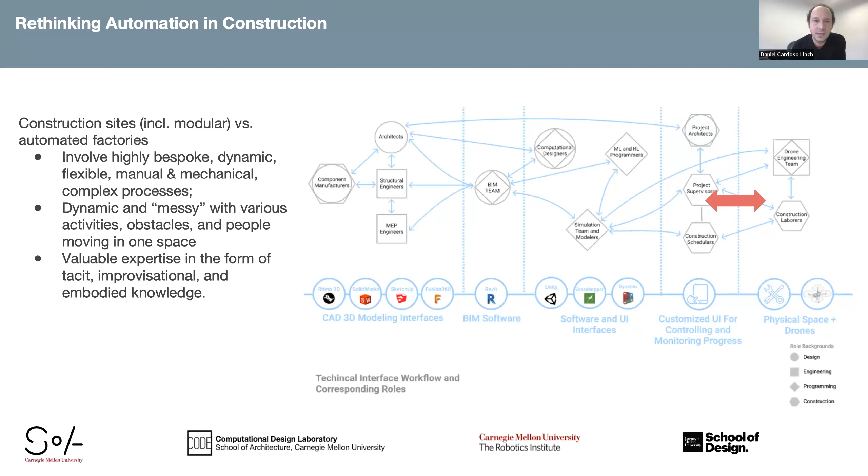So basically, this arrow on the right represents the interface between material production and the definition of digital models for construction. We think this is crucial, essential to rethinking how we design and build in this century.

At a technical level, we're using a particular genre of machine learning, reinforcement learning, which has as a basic premise the idea of trial and error - basically an algorithm that can respond to changing environmental conditions or changing inputs of data.

This is an important difference from conventional industrial robotics, in the sense that rather than relying on pre-programmed instructions or indirect human control, reinforcement learning has the potential to equip robots with real-time, stepwise decision-making capacity that can be exploited in the context of an unstructured environment, such as a construction site or a modular factory.

I think this is very important for architecture and building, because construction sites are notably dynamic environments. They are not laboratories that can be fully controlled, or factories that can be fully scripted. So we think there is promise in reinforcement learning approaches to develop applications and systems that can more dynamically respond to changing conditions and more efficiently and safely support human activities on site.

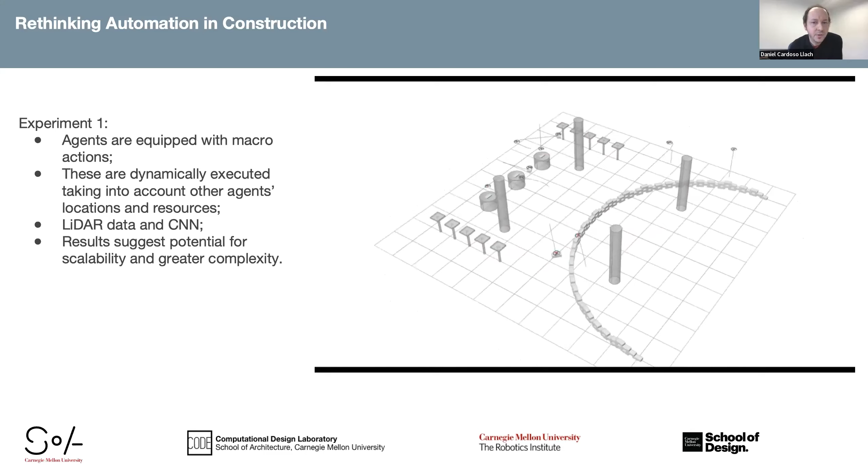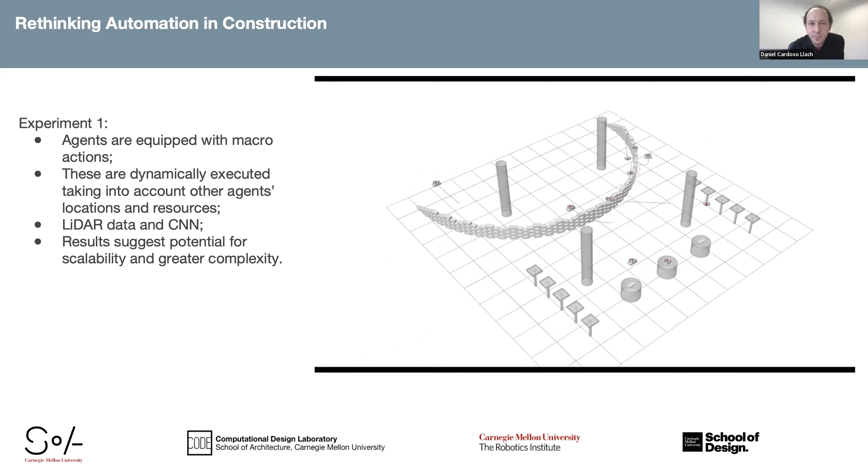In our simulations, we equipped these agents with LiDAR sensor input, and we used common neural network architectures such as MLPs and CNNs to handle different kinds of inputs, and used an evolutionary strategy to gradually increase the difficulty of the learning tasks. Based on this basic setup, we were able to show that this reinforcement learning approach had the potential to be scalable, to have multiple robots collaborating dynamically in a construction task. That gave us the sense that maybe this is interesting, maybe we should look into this more carefully.

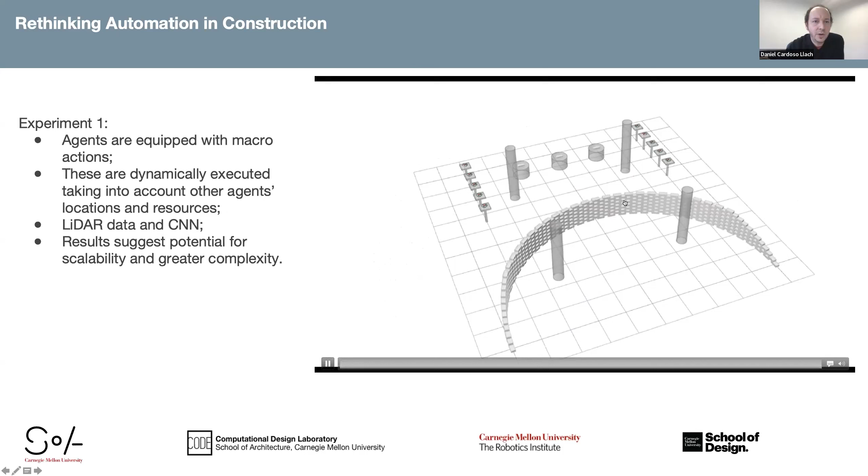We published some results of this experimental work in Acadia last year. But of course, this is a very simple and simplified context, right? We're working with drones where there are a few variables such as material and recharging and some basic environmental change conditions.

So we're interested in how to address the broader complexity of construction. This is the beginning of the project we're in, the MFI supported project, which is exciting to us because we are working closely with industry actors. We're working with PJ Dick, which is a very large construction firm here in Pennsylvania, and with Module, which is a modular factory company.

We are embedded in their workflows, trying to understand and converse with them and develop scenarios for application with them. At the same time, in parallel, we're developing the technical groundwork for the reinforcement learning framework we just discussed. This is an outline of the project.

This is how we're working towards task specification. Basically, we're working with them to define scenarios of application of this technology in conjunction with observations on site and ethnographic qualitative engagement with construction workers directly, and the collaborative definition of benchmarks and areas of concern or interest, both from their side and from our side as researchers.

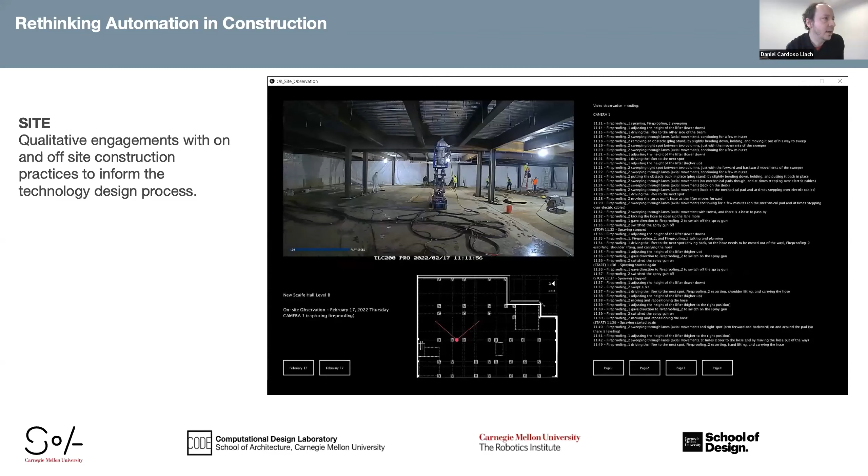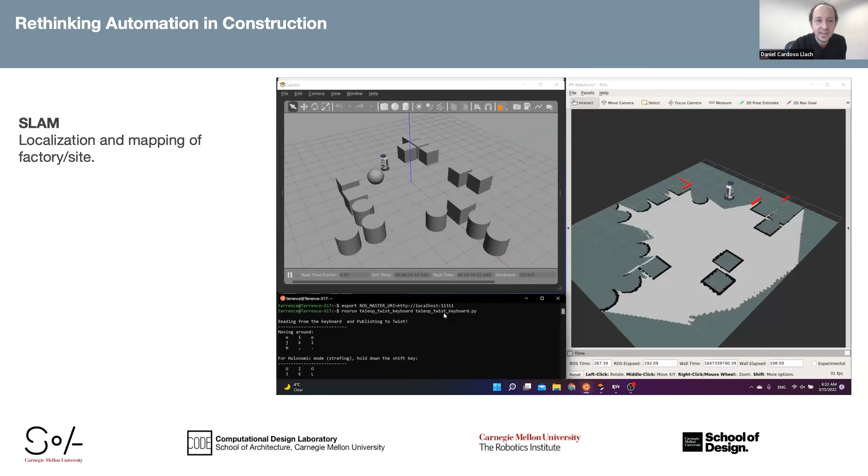Let's move on. Similarly, the pedestrian detection and mapping, and crucially, the social navigation component of the robot. Construction sites and modular factories are places populated by human workers. We want the robot to be able to navigate those spaces in a way that is safe and effective. So we're using social navigation algorithms developed here at Carnegie Mellon in the CMU big group as a way of testing this technology.

So I don't want to extend myself. I'm already above 10 minutes, so maybe I'll stop here. I think this was an outline of the project. I'll be happy to talk more and especially to learn from my colleagues about their work. So thank you so much.

Wonderful. Thanks so much, Daniel. That was fascinating to see these details about your work. Next, I'd ask Keith to share with us his presentation. Sure. Thanks, Keith. Yep.

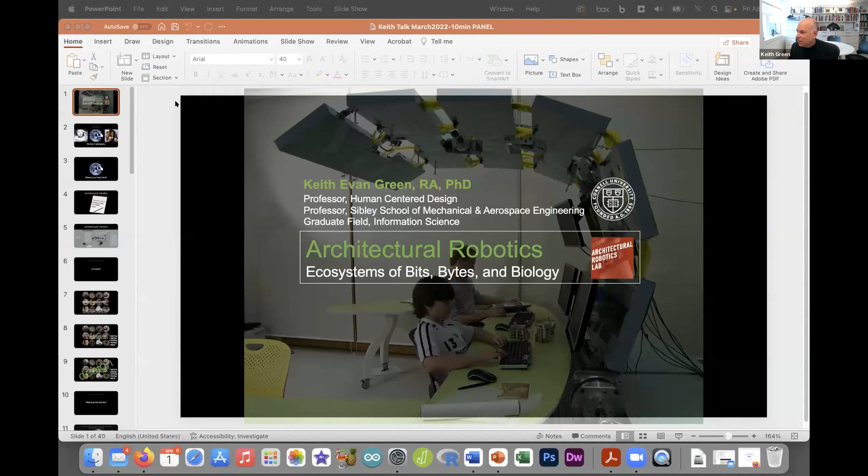Let's see, hopefully something happening there. Are you seeing, it's only on one side. Oh, here we go. We should be on our way. So that people can see things, right? Hopefully, good. Okay, hi.

So I'm Keith Green from Cornell, and I'll get right into it about architectural robotics. Big picture: we live in cyberspace. This is what we often encounter when we're interacting with people—they're interacting with machines, these little machines that we carry around. So the question is, if that's the world we're living in increasingly, an increasingly digital world, where is our home in it?

My response is to develop, as Bill Mitchell said, a robot for living in—a robot that we live in that dignifies, enables, and empowers us. And as Kristian mentioned, I wrote a book about this. I didn't even know if there was a book to write, but MIT Press convinced me that there was. So some years ago, I wrote this book.

And the question is, for whom? Whom is architectural robotics for? We'll define architectural robotics in a minute, but we understand by those two terms together that it's something about architecture and robotics. So we're really thinking about a diverse human population. And what are they doing? Well, they're engaged in wicked problems, under-determined problems of living, learning, playing, working, moving, aging, and other things.

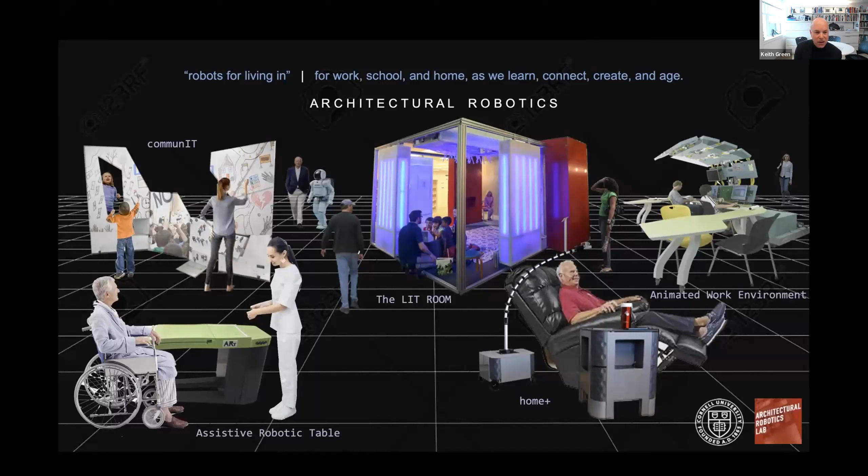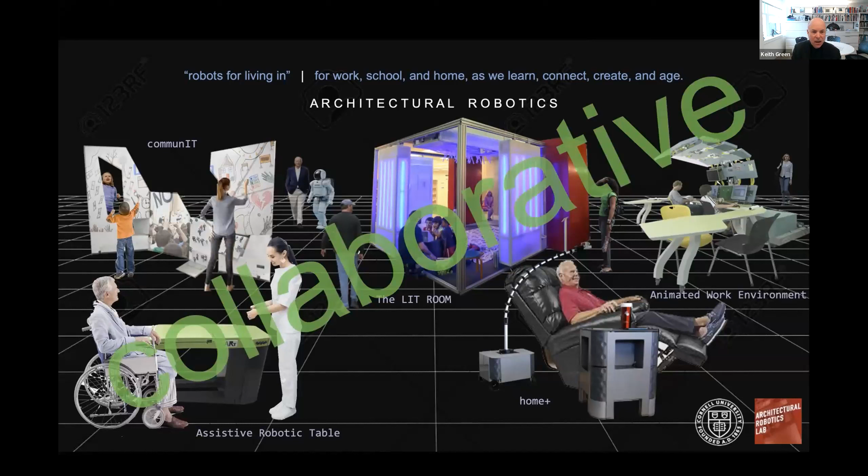I think most of these were in the book, so they're a little bit past tense. We're doing a lot of new things, but it gives you sort of a breadth of the landscape that we're working in. And this is very collaborative—I think it is apt for the topic of today, which is a collaborative environment that has embedded robotics.

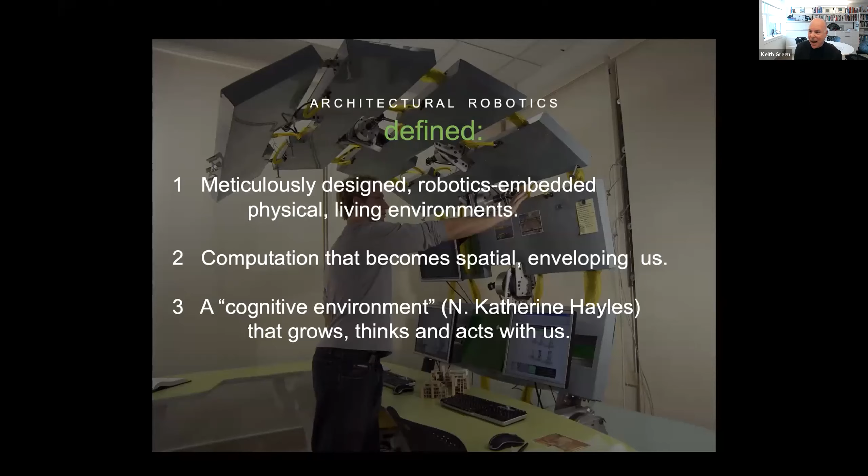How do we define this, finally? A few ways: architectural robotics may be defined as meticulously designed, robotics-embedded physical living environments, computation that becomes spatial, enveloping us. And then, from someone I shared the stage with in Delft for a conference as a keynote, Katherine Hayles, she speaks of cognitive environments. She said, what you do, Keith, is you develop cognitive environments that at least aim to grow, think, and act with people. So why do we want this?

You know, it's easy to say that we have robots and we have architecture, we put them together and that people are going to love them. But it's nice to know that there might be some motivation for developing such things. So I'm going to speak very briefly about five human dispositions for architectural robotics.

The first being psychological: human beings are protean, fluid and adaptive, many-sided, and we seek many and new places to exist. From an evolutionary disposition, we exhibit adaptive flexibility—we've emerged as a species with the capacity to buffer itself and adjust to environmental dynamics. From a learning disposition, the brain wants variation, it wants movement, it wants change. That's how we learn.

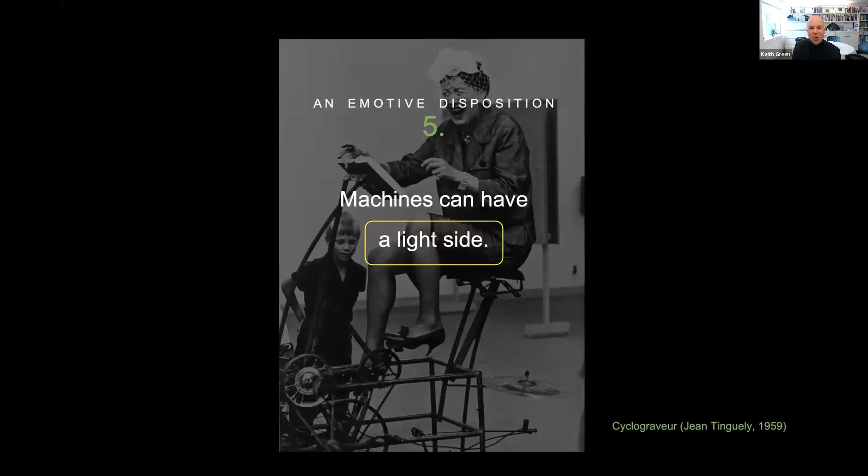And then from a poetic disposition, thinking about Marinetti at the beginning of the Futurists: we have, as Marinetti put it, a burning passion for the coming into being of things, a framework we can consolidate always differently. And finally, an emotive disposition—machines don't always have to be high performance, high performing, functional. They may actually afford people a little bit of pleasure or fun, and that might be an aim.

So let's consider some fundamental questions. I'm at a fairly high level, trying to be more theoretical here. I'm only going to talk a little about individual projects, but let's consider some fundamental questions about at least what I'm doing.

But when you talk about architectural robotics, we're dealing very much with a new human-environment relationship, a different kind of human-computer interaction, because it's all around us. It's not a one-to-one relationship, but something that envelops us. We think of the words of Walter Benjamin from his famous essay, that architecture is consummated in a state of distraction, as opposed to objects, which we more or less commandeer oftentimes.

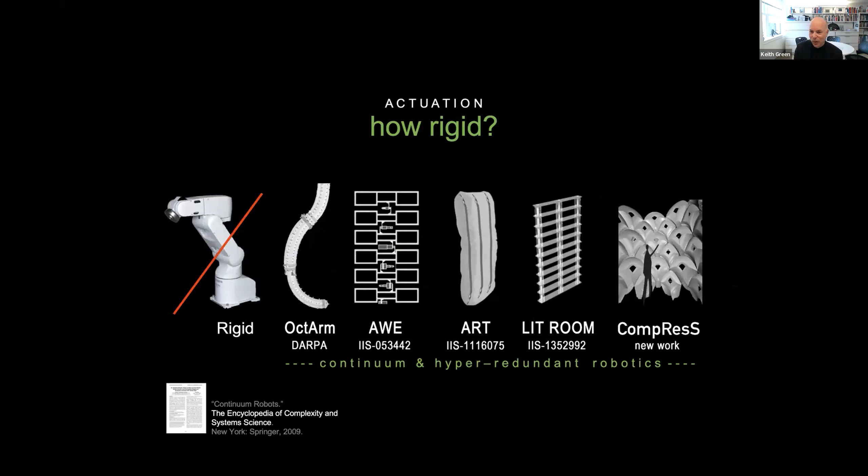And then how rigid? What kind of robotic systems are these? We do work sometimes with rigid robots, but we tend to design things that aren't rigid because they're so close to us in unstructured environments where all kinds of unexpected things can happen. And if these surfaces and shapes are compliant, then perhaps we have less risk when we are intimately engaged with them.

So I was asked, once I've been describing this for a long time, what is this all about? So I made this GIF, right? We've got this humanoid robot, could be Kismet. It's a rather odd menage a trois here. I don't know what Truffaut would say of this, or I guess he did.

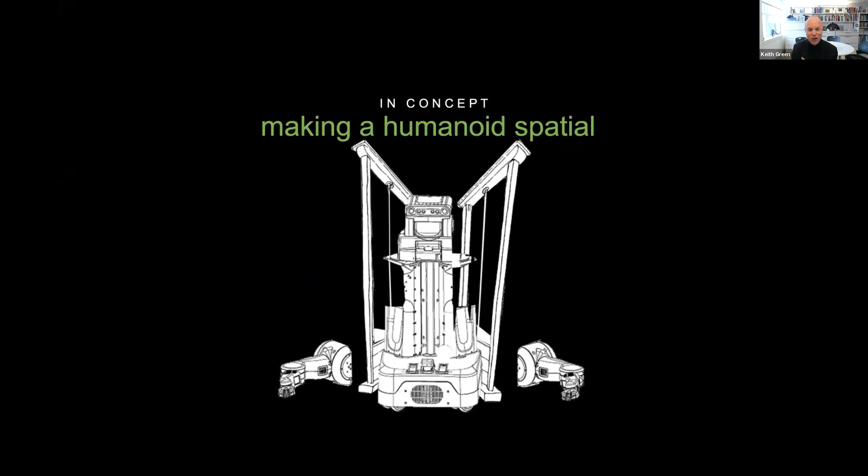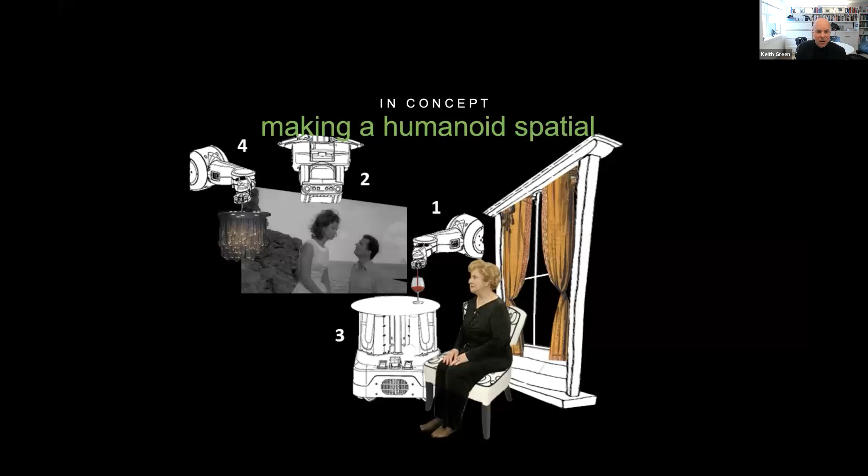But we thought, well, maybe we put a humanoid robot in the center and do a rather French thing with it, take off the limbs and the head, and distribute these in a room. Of course, it's April Fool's, so I'm having a little fun here. But here we are, a distributed system of robots, the humanoid as a distributed, cognitive, networked system. Maybe that's a good place to live.

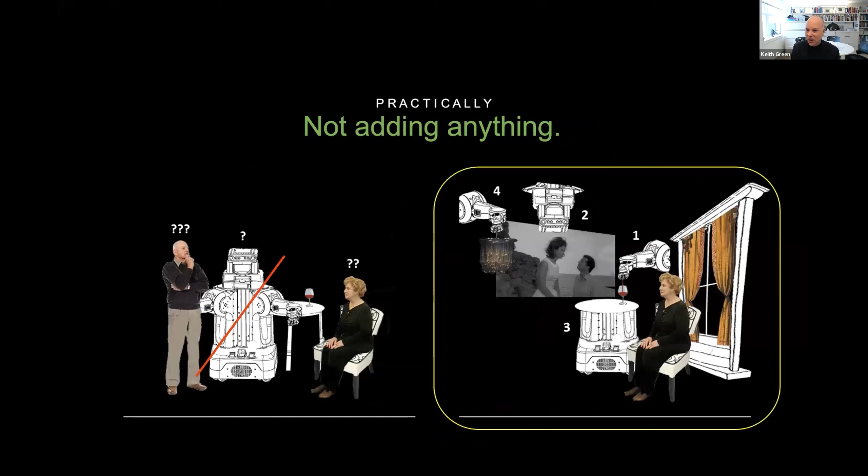And also, you don't have to add a robot to the system. The robot is already embedded in things we naturally have long lived with, like our furnishings. So you get older, you need a robot. Do you really want one to roll over the threshold that looks a little like us, or do you want this functionality already in the space, in the things that we have?

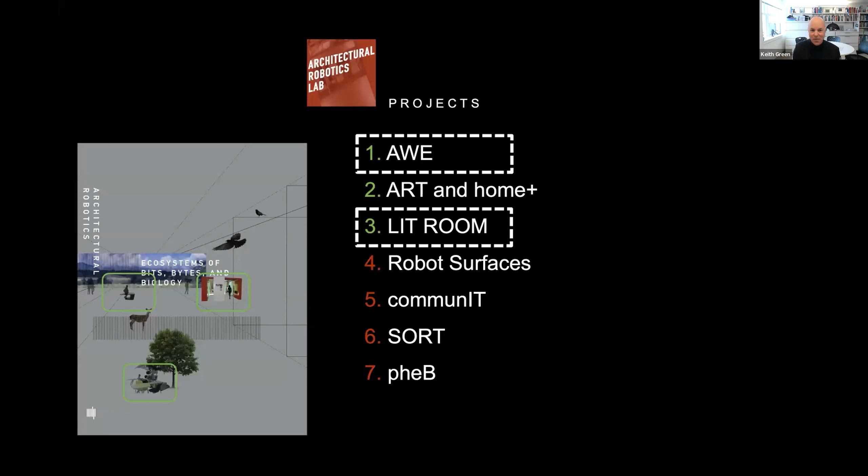So I've got just 4 slides on these. I'm going to show you 2 projects in a little more detail, 2 slides worth. But we're asking the kinds of questions like: what work environment co-locates multiple tech-savvy workers in one place? So not a one-to-one relationship, but a computing platform that invites us to work together.

So we created this, very much the beginnings of the lab many years ago, a robot room we call AWE. It's really a workstation supporting working life in a digital society. We might ask again, how literacy is an enormous problem, and then the question is, how can literacy be cultivated in an environment that becomes a book?

A printed book. So we begin with a printed book and we tell stories in it in a library, in a typical read-aloud with Title I kids that often have many literacy challenges across the US, and even in the Netherlands, where I was teaching for a while. It's a larger literacy issue there than one I would ever imagine.

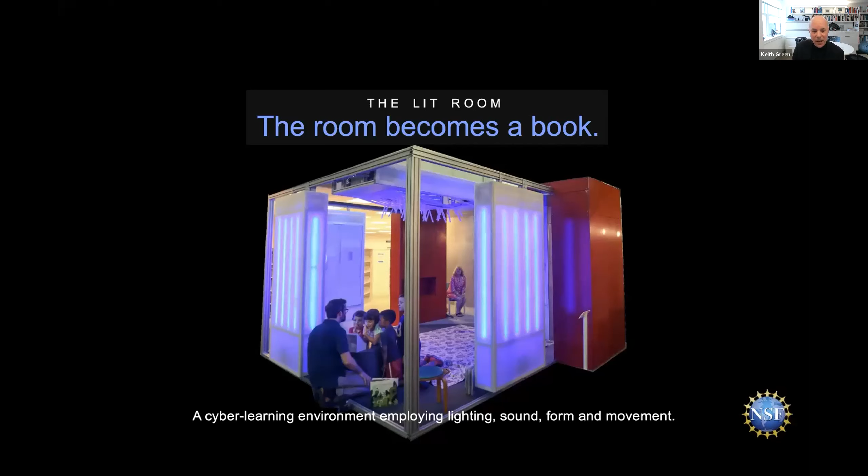And here we are in this lit room that evokes the nature of the book, the atmosphere of the book in sounds, movement, light, shapes, colors. And then the room serves as a scaffold to literacy, as a read-aloud expert reads a book to children. We tested this with scores of kids over many months, with educational PhD and MS students helping us with the interviews and other measures. And anyhow, we presented that at DIS a few years ago in Hong Kong.

So the vision, I'm getting to the end of this already. What's the vision of architectural robotics? We can start with these kinds of things. I'm not dismissing the Roomba robot or the humanoid, if we can ever create one that we can afford and that acts as some of us think they might. I'm not so sure we'll get there quickly, but we think we could put these things together in this sort of landscape.

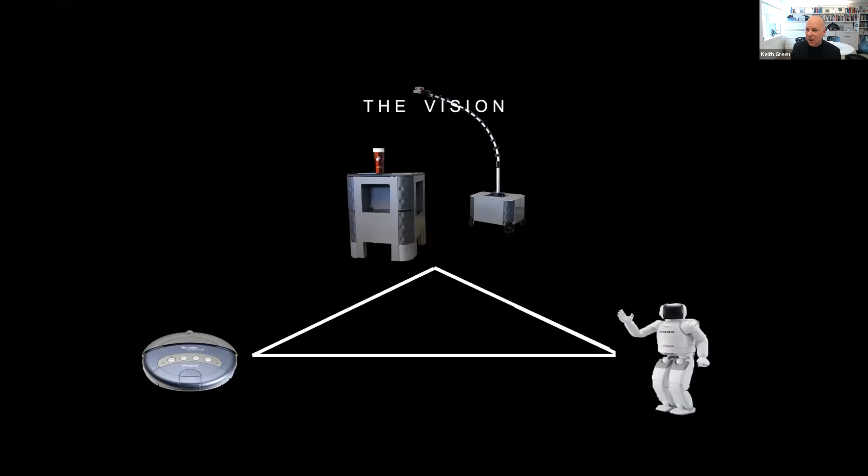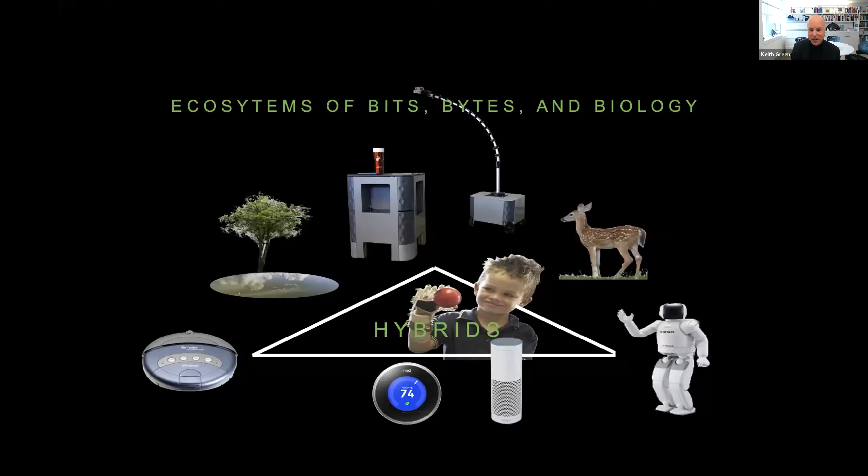And we could add the other things, or just recognize the other things already in the landscape, like the various devices that we have, and nature. And also that we ourselves are becoming, in a way, post-human. I like to think of the things we're developing as, to borrow the words of John Cage, a garden of technology, where each inanimate object has a spirit. And so the spirit of all this is to think of ecosystems of bits, bytes, and biology.

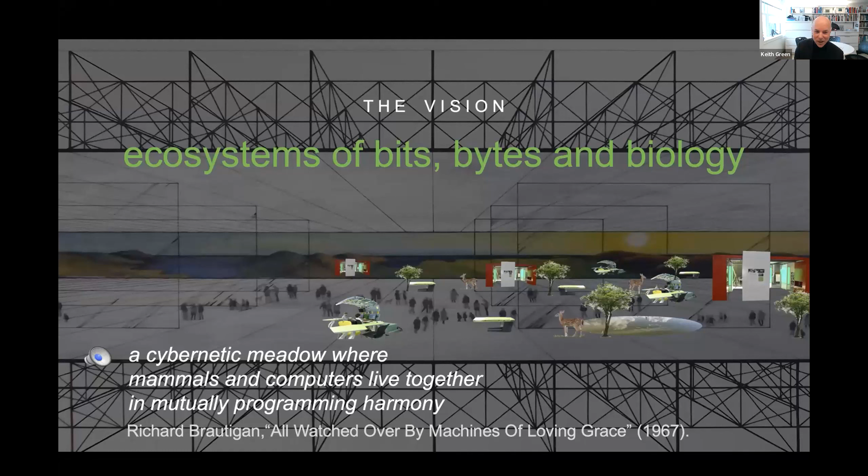Here I'm borrowing words from the 60s, from Richard Brautigan, a marvelous poem. I won't play it, I'll just read these few words and we'll move on. He speaks of this vision of a cybernetic meadow, where mammals and computers live together in mutually programming harmony. And that's what we aspire to. And that, in a few moments, is a little bit of what we do in the lab.

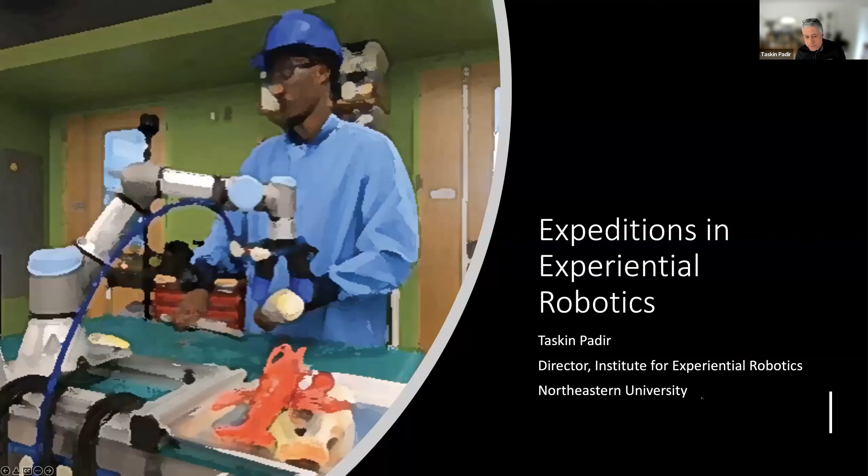Well, good afternoon everyone, or good day wherever you are. Again, thank you Kristian for inviting me to this panel. And I want to make the case for experiential robotics today, which is our brand at Northeastern University. And to do that, I want to first give you an idea what we mean by experiential robotics.

To us, there are four inseparable elements of experiential robotics. I hope when you first heard the term experiential robotics, you found it a little bit unexpected. Where did this come from? And you wanted to know more. That's our immediate hope. There are four elements of experiential robotics, and it all starts with the human experiences.

It is not about robots. Experiential robotics, as a field, it's not about robots. It's about the humans. It's about the human experiences, from aging in place, to how we interact with our self-driving cars, transportation, societal problems, hard problems, to infrastructure. I was very happy to hear about Daniel's project on integrating robots into construction, but then we also have the aging infrastructure. Sustainment is another big piece of the entire deal.

And it all starts with how do we provide ourselves, the society, with better means and ways of doing our jobs, having entertainment, right? Experience is such a loaded, encapsulating term. So we start with human experiences, come to the labs and develop the technologies, and we have a very broad definition of what a robot might be. Then we go back and experiment and really validate our solutions with the question: are you better off? Do you now have a better experience because you have your robot companion next to you? So that's element number one.

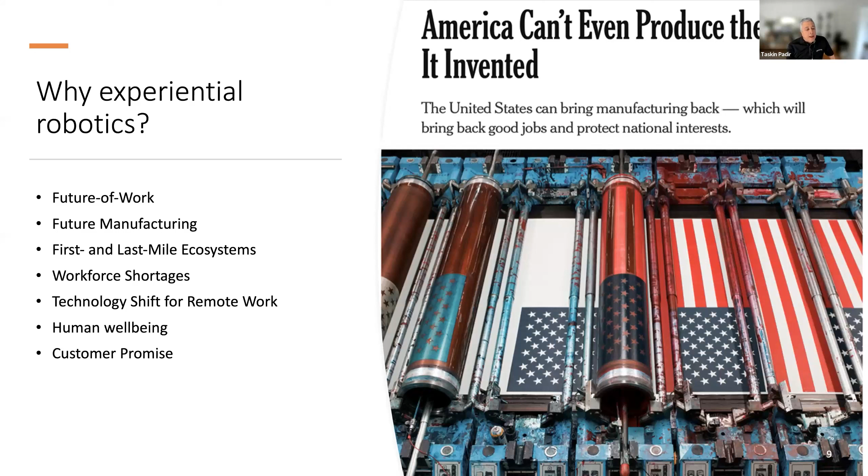Workforce shortages never disappeared, actually. There were certain jobs, we all hear about unemployment at all levels. However, if you talk to manufacturers, makers, they always had jobs available requiring certain skill sets. So on and on, I don't want to spend too much time on it.

At the institute, that I happen to be the flag carrier of, but Kristian is a part of, and I notice a number of our core members are here today. We have a number of research thrusts where we look at human-robot teaming, where we look at embodied AI.

Yes, we are interested in machine learning and AI, but really, what can we transfer from those theories and foundations to actual physical robots? We are interested in new systems design and control. A robot doesn't look like a robot arm, doesn't need to look like a humanoid.

An entire environment—Kristian is going to again, hopefully, smile—an entire environment can be a robot to enable the vision.

And again, not only ethical considerations, but policies and economics of deploying those systems within global frameworks.

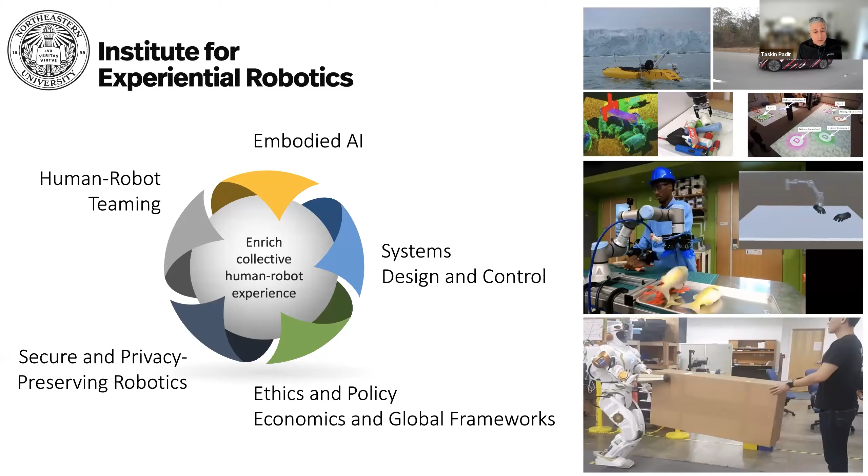So with this in mind, I want to talk about two very brief examples. The first is a project we've been working on for more than a decade, and I believe this is one of the best illustrations of what we mean by experiential robotics. It started off, okay, here's the Amazon fulfillment center, and here's a worker, a healthy worker.

What if we want to provide a similar experience to a worker who is mostly healthy, however has a hand amputation, doesn't have one of her hands? Can we still provide smooth interactions with the environment and basically the ability to complete the task?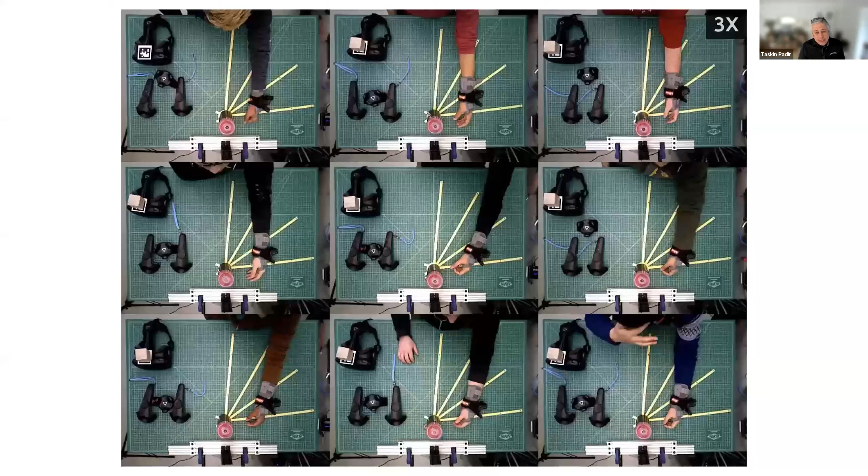When we first put in this proposal to the National Science Foundation, I said, look, this is such a crowded area. There are a lot of big players in this research. What should we do to differentiate ourselves? I said our likelihood of getting funded is small, but it got funded for almost 5 years. It was a large collaborative effort with Northeastern, Worcester Polytechnic Institute, as well as Spaulding Rehab Hospital.

A prosthetic hand is interesting because, Keith, I want to call out your sliding scale: your robot may know what to do, but it is still moved to places by a human arm, and we do unpredicted things. My approach might be totally different than Kristian's approach to objects. So rather than starting with, oh, let's add all these algorithms, cameras, and sensors to this robotic arm or hand...

Let's understand how people reach to get to places. We collected data from a number of people just to understand what happens when we reach to grab our phones or our coffee cup, and we found interesting aspects. We reach the maximum speed of our hand right around the 60% mark of the trajectory.

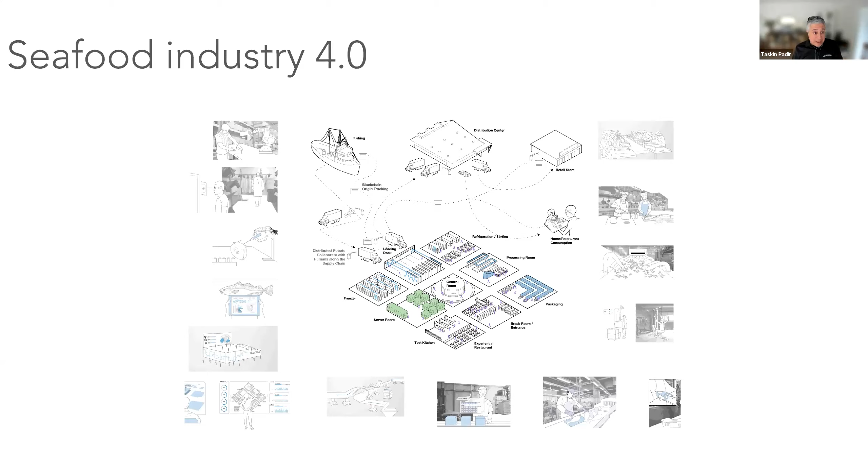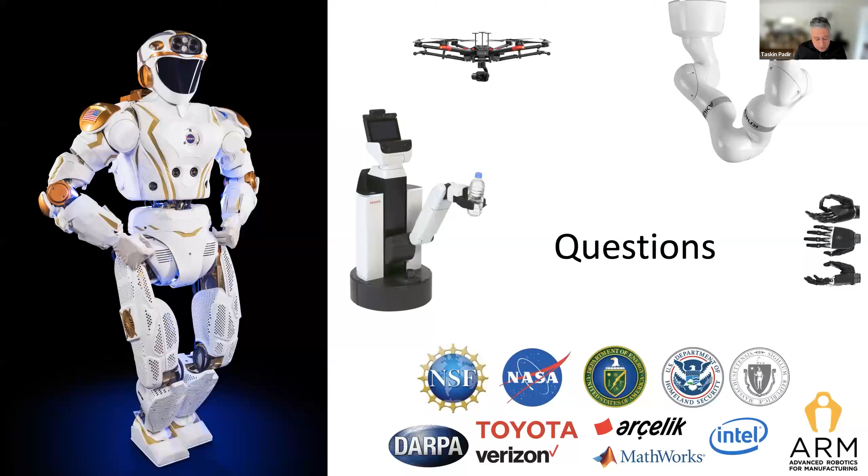This is our latest work where we looked at a straightforward, simple handover task. This is a paper we just submitted, where we work with collecting human biometric data to provide, number one, a better ergonomic posture if it's preferred. Number two, perhaps there is a way to stimulate the human workers' movements - at the end, they maybe get some exercise out of it, or feel better about the job because it's not that dull and straightforward. With this, I'll stop here and I'm happy to answer questions.

Thanks, Taskin. Thanks for your presentation. It was great to see, and in fact it was nice to see our research team in the seafood processing gear, since we'll be back there next Friday in Boston Seaport with the group again.

Thanks everyone for these wonderful presentations. I think we covered lots of ground. Some points stuck out in several of your presentations, and I've got a large number of questions, but I'm going to try to keep it to a few.

I want to start with Daniel. You talked about the robot in the loop, and that's obviously a wonderful inversion of the much more common term of human in the loop. Can you tell us a bit more about your thinking behind this inversion of the approach, and issues of symmetry of human-robot collaboration that you see at the basis of your work?

Thank you so much, Kristian. Yes, inversion is a good way of looking at it. I think one important premise for the work we're doing in this project is to tactically avoid the notion of human-robot collaboration, because it automatically implies a sort of symmetry between humans and robots in a work context, and that symmetry can be a useful device to communicate the vision of this kind of ecosystemic relationship between humans and robots.